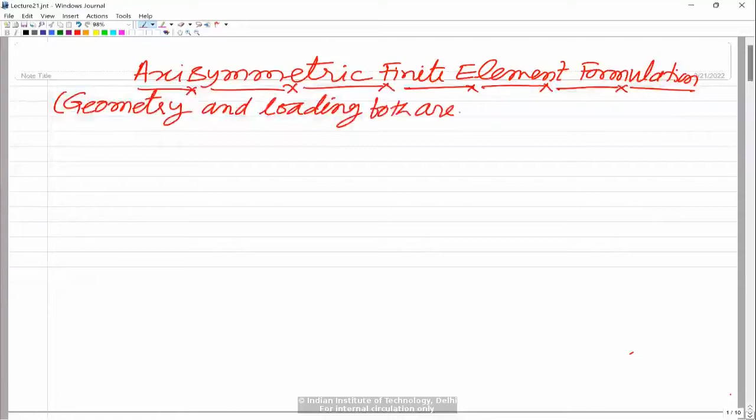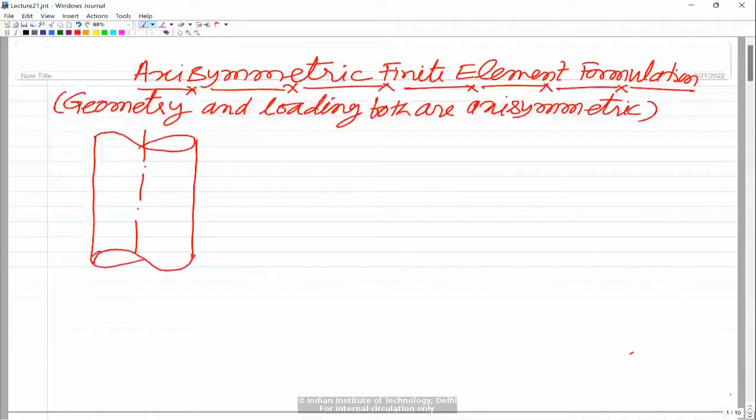The examples are like if you have a rod - there is an axis of revolution about which a cross section can be rotated and generated. Let us say we have this as a rod, under axial load. Although this can be modeled using truss element, when we look at the length to diameter ratio - L by D equal to 3, 2, or 1 - in that case we want to model this differently.

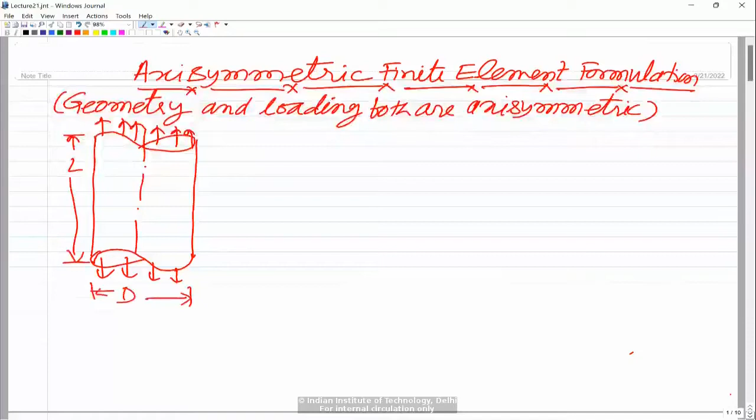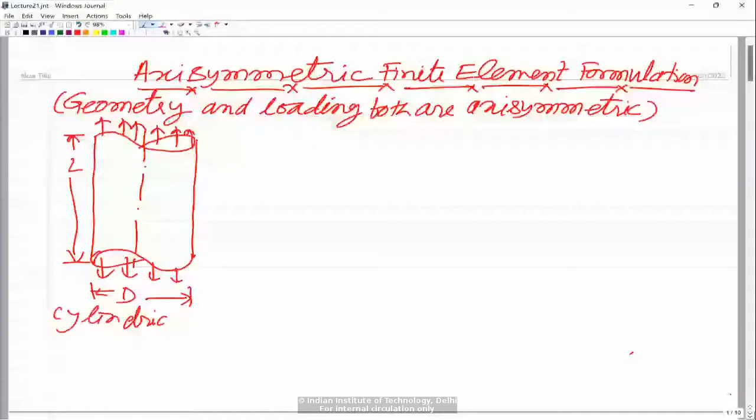So for modeling this rod, because this is a body of revolution, the entire cylindrical rod can be generated by revolving this one cross section about the axis of revolution. So that is one example of axisymmetric problem.

And the loading is also axisymmetric, that means it is independent - throughout the circumference, the same loading is there. So this is one example.

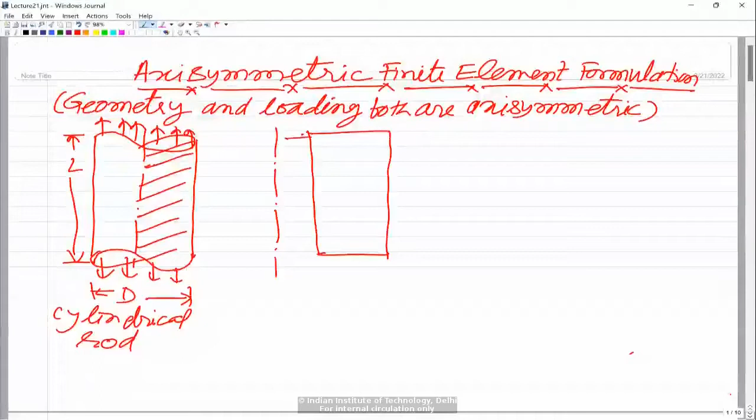Another example is a thick cylinder. Let us say this is the axis of revolution for the thick cylinder, and the thick cylinder is like this, subjected to internal pressure. The whole cylinder can be generated by revolving this cross section about this axis of revolution, giving us the thick cylinder under internal pressure. This is axis of revolution or axis of symmetry.

So this kind of problem, rather than modeling using three-dimensional elements, you model only one cross section. So the computational requirement is less - you will have lesser number of total degrees of freedom, so computationally it can be solved more efficiently.

The general case would be a general body of revolution. Let us say we have a body of revolution like this, but it is thick - this whole body can be generated from this cross section. The simplest example is a submarine, where many conical shell parts - thick conical shells - can be modeled using this. This is again the axis of revolution or axis of symmetry.

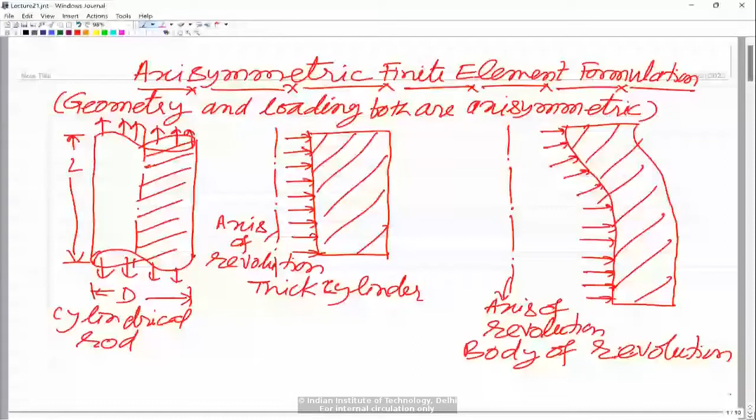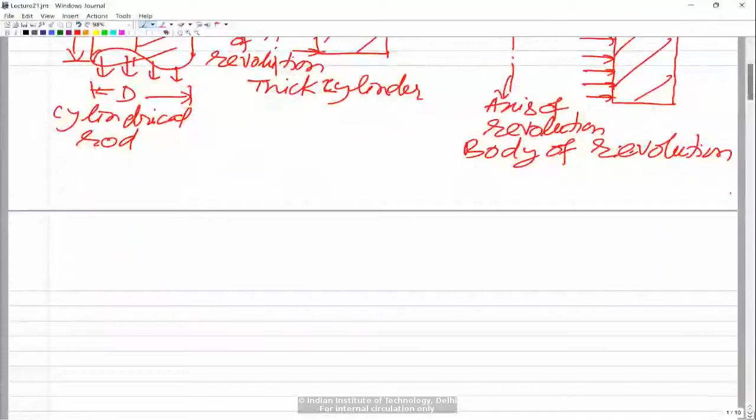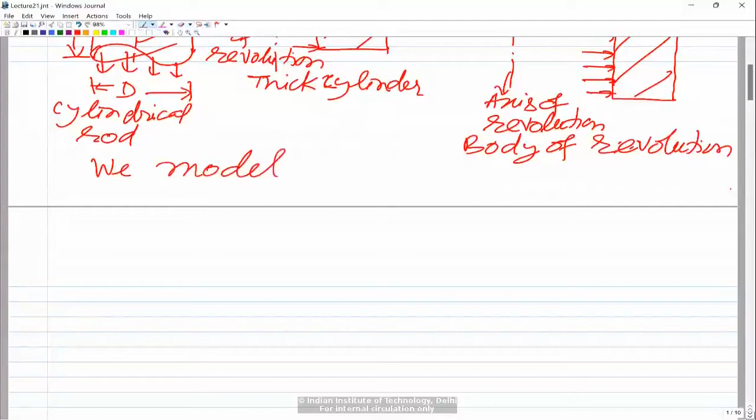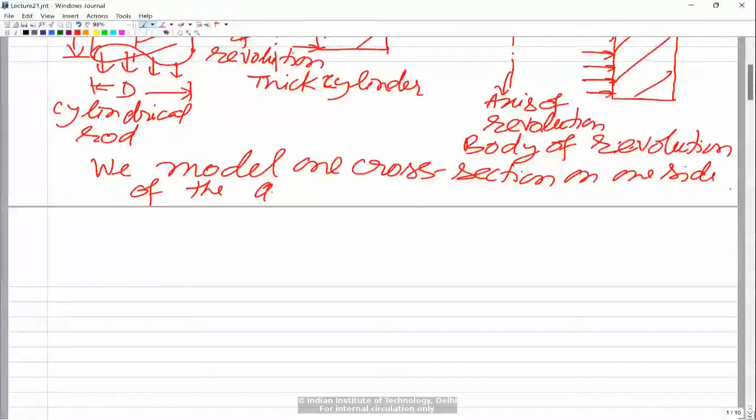So in this model, what we are doing in all the examples I gave is basically modeling the one section on one side of the axis of symmetry. We model one cross section - the one which can be revolved around the axis of revolution and can generate the entire body - on one side of the axis of symmetry or axis of revolution, also called axis of symmetry.

So you can generate the entire body by revolving that cross section. That is why we are using this. So these are the examples. Of course, if you look at most of the submarine, the components would basically be thin shells, but some parts you will have which can be modeled.

This propulsion shaft can be modeled as a body of revolution under thrust, which is axisymmetric. Also, if the bending load is there, you obviously cannot model it because in case of bending, the loading is not the same along the circumferential coordinate direction. So you cannot model under bending loading, but under the axial load and under the internal pressure load you can model that.

Now, of course, the thick cylinder - that's the main example - thick cylinders are bodies of revolution, that is what you can model using this. So wherever you have that kind of body, it can be modeled using this axisymmetric finite element.

So we will discuss and start with the basic concepts. First, as we have been doing, we look at the displacements. Displacements are, again, we are assuming the geometry is axisymmetric, so we can generate the entire geometry by rotating one cross section about the axis of revolution.

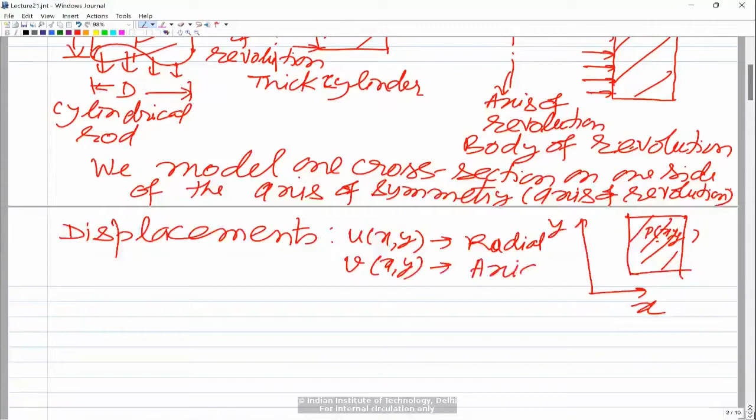Let us say this is the body under consideration, and we want to look at the displacement at any point P with coordinates x and y. So the displacements would be u, which would be a function of x and y - this is basically the radial displacement. Then you will have v along the y direction, that is along the axial direction, which will also be a function of x and y - this is the axial displacement. And the third is w, which would be 0, meaning no circumferential displacement.

Theta is the circumferential direction - no circumferential displacement. So these are the two independent displacements.

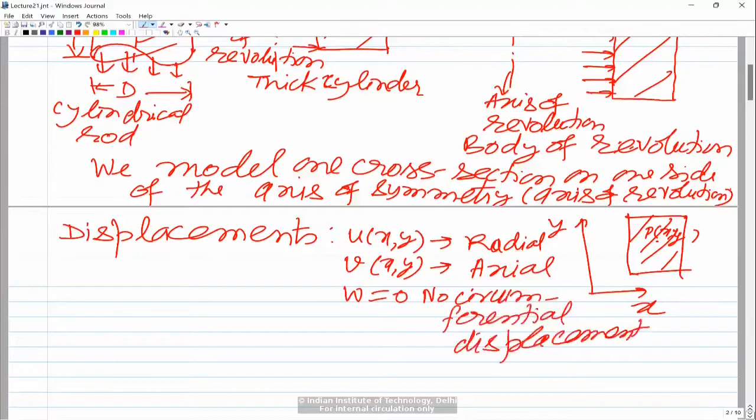So you would see that in terms of displacement, it is similar to plane stress, plane strain problems. There also we had two displacements u and v, which were functions of x and y. But in this case, this is the body of revolution, and you would see the x coordinate is the radius at any point P. So if you see here, this is your x coordinate, which is radius, and y is the y coordinate of any point, that is the axial coordinate.

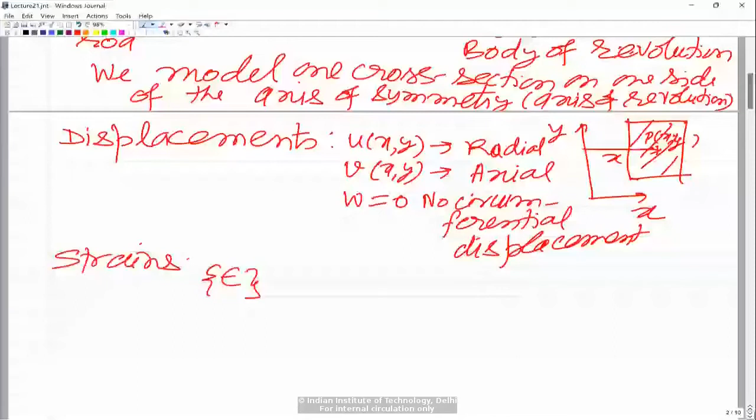So with these two displacements, if you look at the strains now, you would see this is similar to plane stress, plane strain problems. Only thing is, compared to plane stress, plane strain, we will have one extra non-zero strain. So there would be three normal strains: epsilon xx, epsilon yy, epsilon zz, and gamma xy.

Out of this, if you look at epsilon zz, we can also call it epsilon theta theta - this is epsilon zz, which is equal to epsilon theta theta. We call it the circumferential or hoop strain.

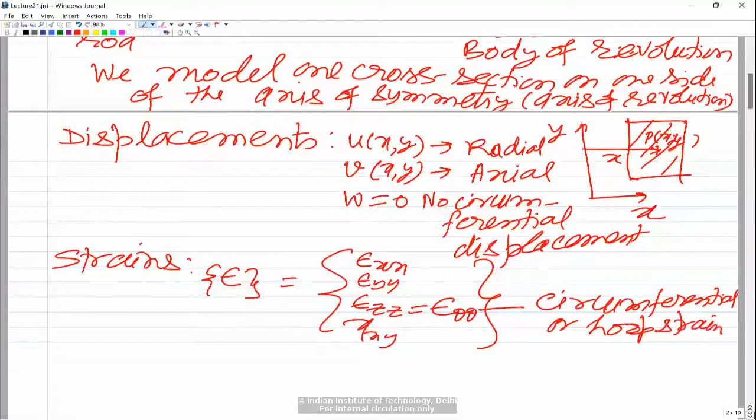But we need to express these in terms of displacements, because displacements are our basic unknowns. You would see epsilon xx is similar to plane stress, plane strain - it is del u by del x, and epsilon yy, strain along the y direction, is del v by del y. But the hoop strain, although there is no displacement along the z direction, there is a hoop strain, and that hoop strain is the radial displacement u divided by radius x. That is the hoop strain epsilon zz, and gamma xy will be equal to del u by del y plus del v by del x.

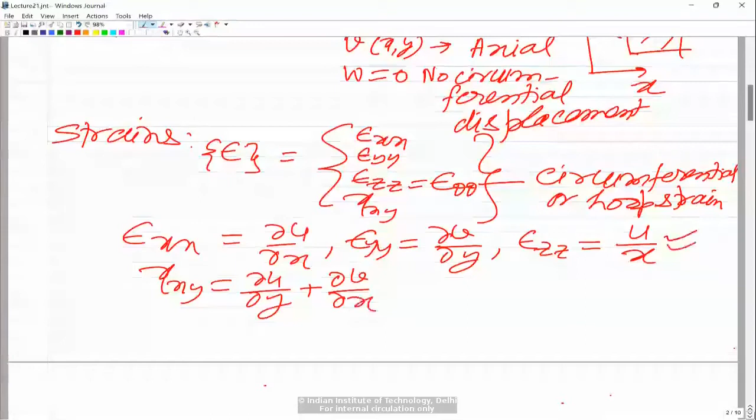So you would see that epsilon xx, epsilon yy, and gamma xy are similar to plane strain problems, but the hoop strain is an additional strain component which you have in case of axisymmetric problems. So we will have to account for that strain as well here.

As you know, epsilon xx - if you take a line element parallel to the x-axis, the change in length per unit original length, when the original length tends to 0, that is what is your epsilon xx. Similarly, epsilon yy - if you take a line element parallel to the y-axis of length delta y and look at its change in length delta v, then delta v upon delta y in the limit when delta y tends to 0 is epsilon yy. And similarly, this is the change in angle between line elements parallel to x and y.

So that is gamma xy, the change in angle between line elements parallel to x and y. And epsilon zz, how do we get non-zero epsilon zz?

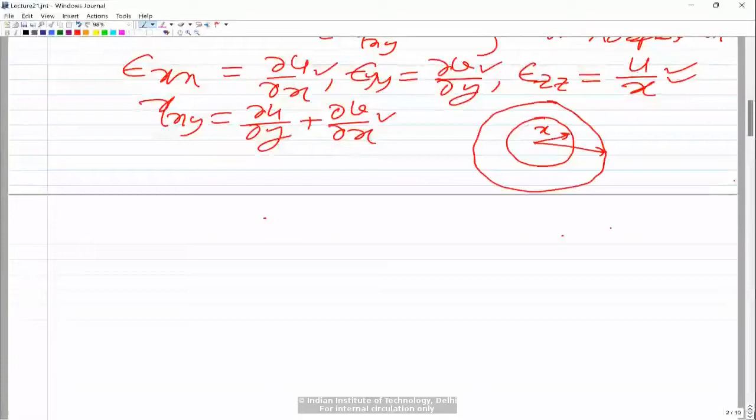It is like this: if you take a circle, say originally the circle is of radius x in the body, then under the application of loading, this circle deforms and takes a deformed shape. Because we have a radial displacement u, the final radius is x plus u. So you would see this is the deformed circle, and this is the undeformed circle.

So actually, if you look at epsilon zz, the interpretation I wanted to give you is this: it is the change in circumference per unit original circumference. Change in circumference would be circumference in the deformed configuration minus circumference in the undeformed configuration. Circumference in the deformed configuration is 2 pi times u plus x, and in the undeformed configuration is 2 pi x, divided by the original circumference, 2 pi x. You will see this comes out as u by x. So this is what you have as the hoop strain or circumferential strain for these problems.

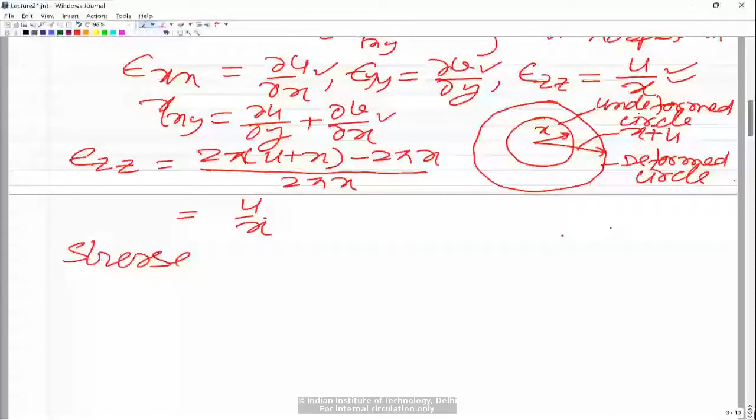And corresponding to these strains, you will have the corresponding stresses. So what are the non-zero components of stresses? Of course, I am not discussing here how to find the principal stresses, the Von Mises stress, or the maximum shear stress, because those are used in design for multi-axial loading problems. You should be able to refer to any book on basics of solid mechanics for that, for practical applications.

The sigma will again have non-zero four components: three normal stresses, sigma xx, sigma yy, sigma zz, along x, y and z directions, and there is a shear stress tau xy. So these are the non-zero components of stresses, while tau yz and tau zx are equal to zero. So these two shear stresses are zero, and the four stress components are non-zero.

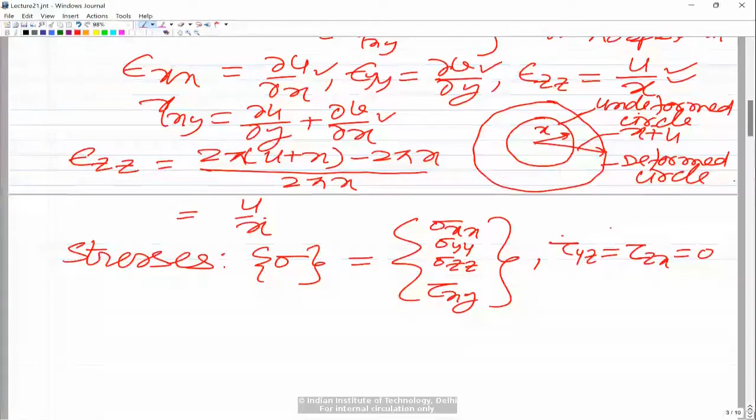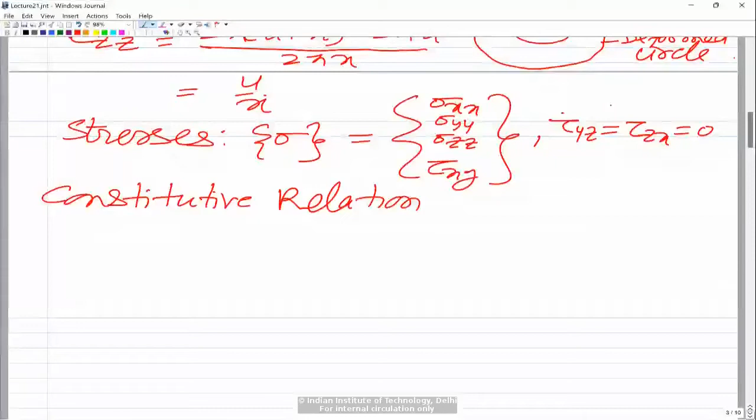As usual, the way we did for the plane stress, plane strain problem, we need to relate the stresses with the strains. So we have what is known as the constitutive relation, that is the relationship between stress and strain. I am writing this only for linear elastic isotropic material, although you can also talk about orthotropic materials and so on.

For this, the form of the stress-strain relationship is going to be the same as we had for the plane stress plane strain problem. So C is the constitutive matrix into epsilon, where sigma and epsilon we have already defined. For the axisymmetric problems, C is similar to what we had for the plane strain case; only thing is one normal strain and corresponding normal stress are the extra non-zero components. So we have E upon 1 plus nu and 1 minus 2 nu.

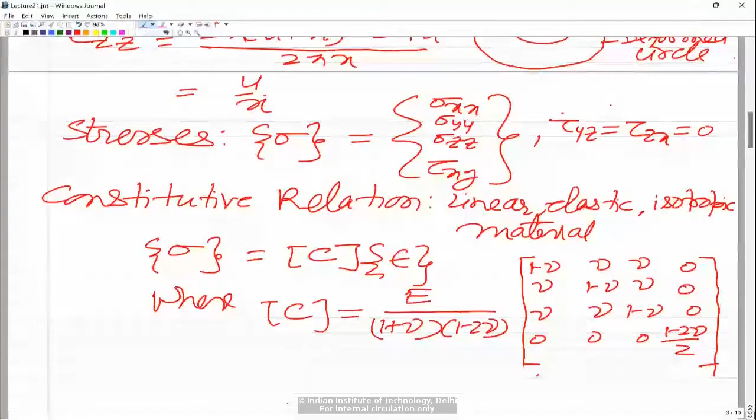So basically, using C, you should be able to write sigma xx, sigma yy, sigma zz, and tau xy in terms of strains. Now for the development of the governing equations, one way is that we look at the differential equations and then obtain the weighted residual statement, then the weak form and the integral functional, or we can write directly the integral functional also. Let me write the total potential energy functional.

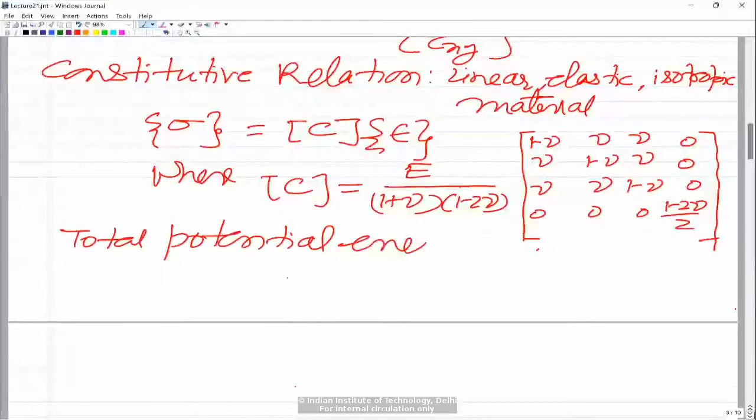So total potential energy functional would include strain energy. Strain energy is half integration over volume of sigma transpose into epsilon, and sigma is C into epsilon. So sigma transpose becomes epsilon transpose into C transpose. C is symmetric, so its transpose is same as C. So you can write this as epsilon transpose into C into epsilon into dV. This is the strain energy.

The first term is strain energy, then potential of body forces. We are writing this similar to what we have been doing earlier. So U transpose into body forces, and we will have only two components of body forces along x and y direction, FBx and FBy, integration over volume, and then the integration over the boundary of the element.

The boundary could either be having normal along radial direction, or it can have normal along the axial direction, that is y direction. So I'm writing this as a boundary integral, and again the terms are similar to the plane stress plane strain problem.

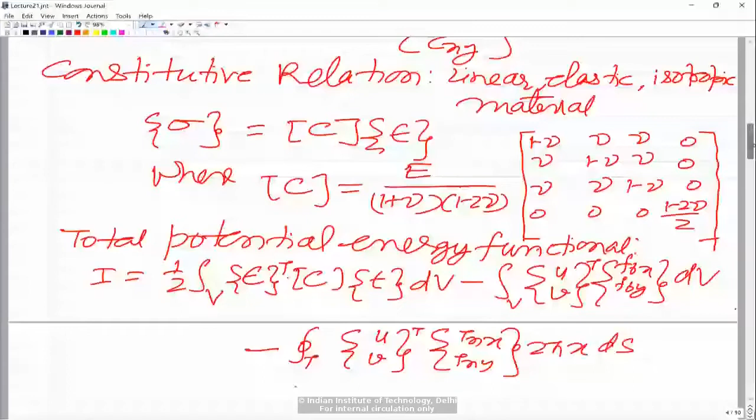We use the same quantities: the body forces fbx, fby, traction forces tnx, tny, which are also forces per unit area. Here we need to multiply by 2 pi x into ds, where ds is the length along the boundary. So either the boundary is having normal parallel to x axis, that is radial direction, or boundary having normal parallel to y axis, that is axial direction.

So this is the total potential energy functional. This is as far as the basics of any axisymmetric problem formulation are concerned. Now we look at a particular element.

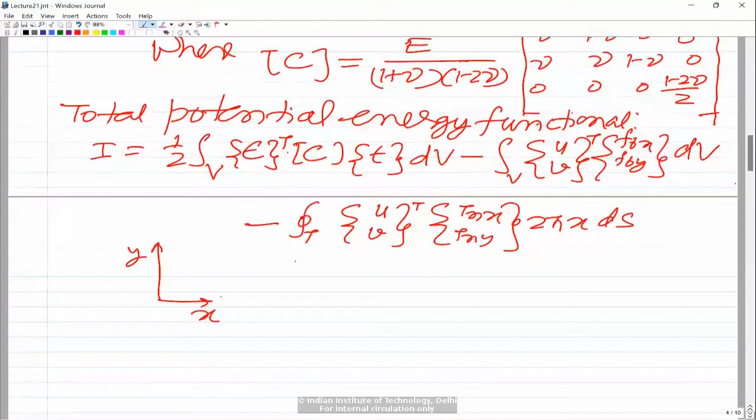We want to do the axisymmetric formulation for an element. Let's say x is the radial direction here, y is the axial direction, and the element is a four noded quadrilateral, having nodes 1, 2, 3, 4, with coordinates. We map this to a square in the natural coordinate space, xi and eta, with nodes 1, 2, 3, and 4. So this is the four noded element we are talking about.

This is a four noded isoparametric axisymmetric finite element. Isoparametric means geometry and displacements are interpolated using the same shape functions. So the shape functions are going to be same as what we developed for the plane stress, plane strain case.

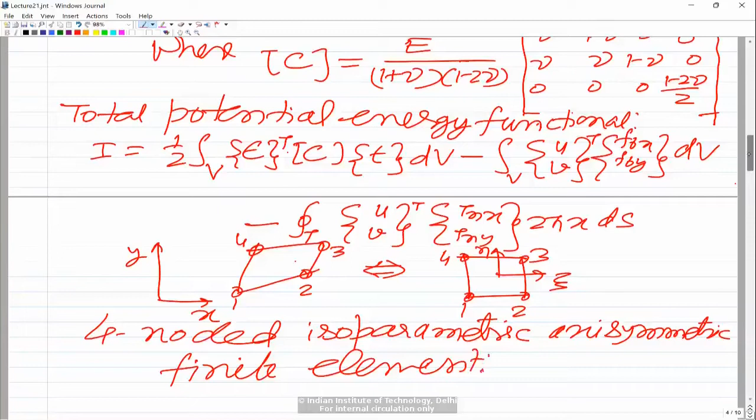I'm directly writing u and v. The displacement approximation would be similar to what we had for the plane stress, plane strain problems. Actually, if you look at many of the packages, you'll have this 2D element, and then you can choose either plane stress, plane strain, or axisymmetric, because the formulation is more or less the same for all three problems. So these subroutines in the softwares are actually combined.

If you look at the degrees of freedom, we write all the degrees of freedom of first node, second node, third node, and then fourth node. Primary variables are displacements along x and y, that is radial and axial displacements. So for the element total we will have 8 degrees of freedom: u1e, v1e, u2e, v2e, u3e, v3e, u4e, and v4e. These are the values of U and V at nodes 1, 2, 3, and 4.

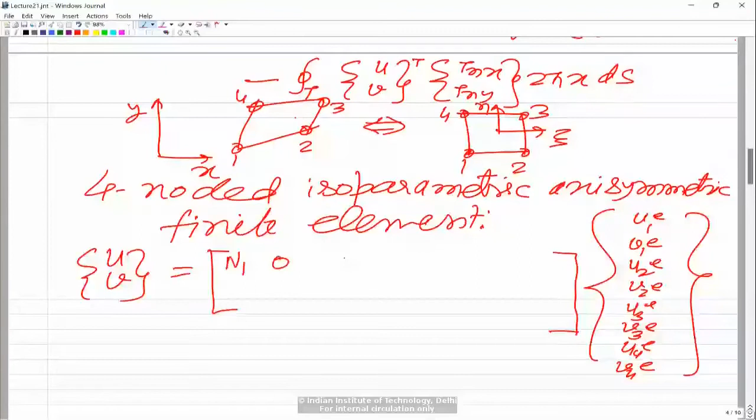The shape functions are the same N1, N2, N3, N4. I'm not writing them again because we have already defined them for the plane stress, plane strain case. So we have n1, 0, n2, 0, n3, 0, n4, 0, and then for v it's 0, n1, and so on. This gives u equal to n1 u1e plus n2 u2e plus n3 u3e plus n4 u4e, and similarly for v.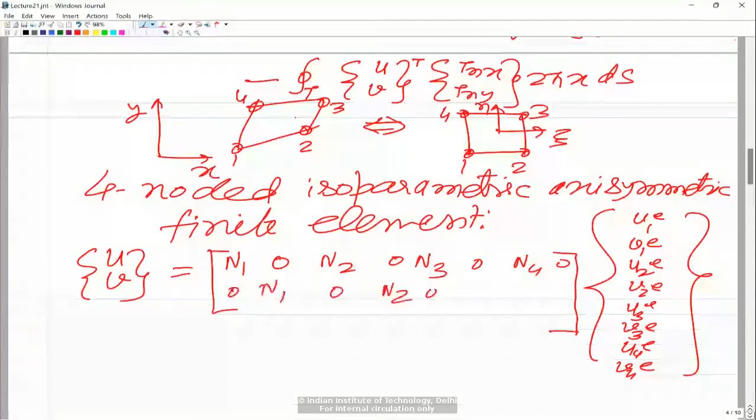As usual, we write this matrix as H matrix into DE, where this is H and this is D. You interpolate x and y also in exactly the same way. X is of course the radial coordinate, or its radius. So you write x equal to sum over i from 1 to 4 of ni into xi, and similarly y coordinate you write as ni into yi, sum of four terms, i going from 1 to 4.

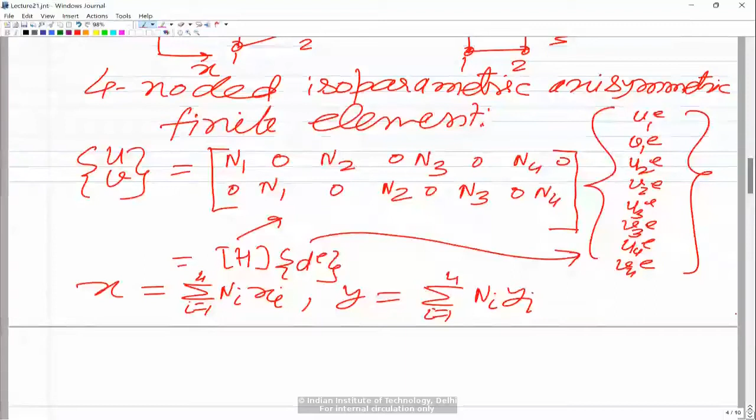The Jacobian matrix will also be the same way I had introduced the concept earlier. Once you have x and y expressed in terms of xi and eta, you can get your J, the Jacobian matrix, which is del x by del xi, del y by del xi, del x by del eta, and del y by del eta.

Then you need the strain interpolation for the strain, epsilon, which consists of four elements for axisymmetric problems: three normal strains epsilon xx, epsilon yy, epsilon zz, and the gamma xy. Gamma xy can also be written as twice of epsilon xy, since epsilon xy is the tensorial component of strain. This will again be written in terms of the derivatives of the shape functions.

We already have learned how to get the shape function in terms of xi and eta, and then how to get their derivatives with respect to x and y. We have already discussed that concept. These degrees of freedom are the same: u1e, v1e, u2e, v2e, u3e, v3e, u4e, and v4e.

Now epsilon xx is del u by del x, so it is in terms of u, and it's the derivative with respect to x. u1, u2, u3, u4 are basically values of u at node points, so they are constant. So the derivative will only go with the shape function. So here you will have del n1 by del x, 0, del n2 by del x, 0, del n3 by

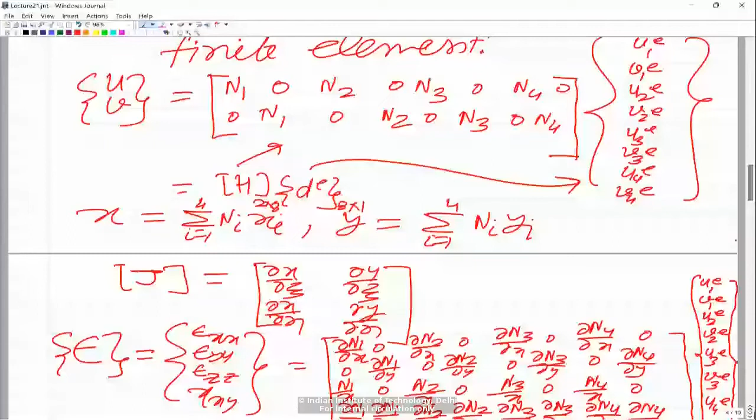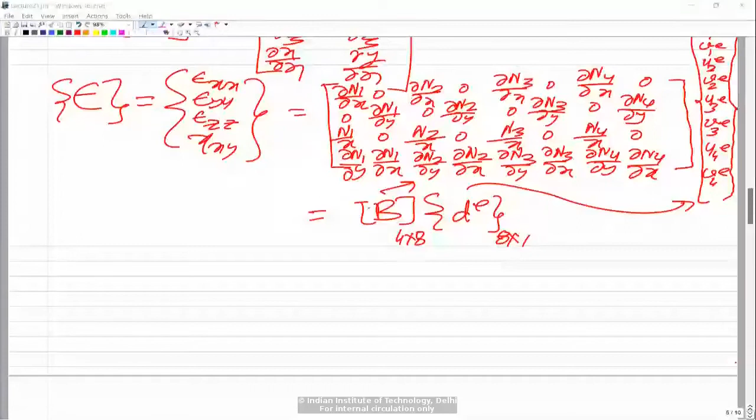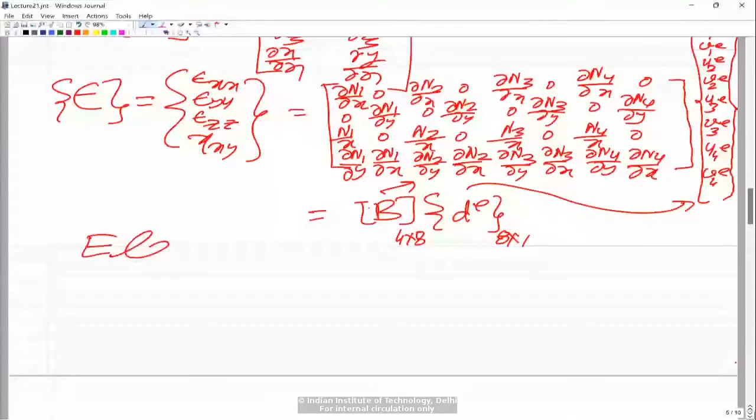So once you have defined H and B, the procedure for developing the element level governing equations is the same. That is, we basically substitute these approximations in the integral functional, then take the variation of the integral functional and equate it to 0, so delta I equal to 0 for arbitrary value of delta D, and from there we get the element level governing equations. So those will be the same. You will see that the form of the element level governing equations is actually going to be the same, so you should be able to derive it. I am not deriving that, so I am directly writing the element level governing equation.

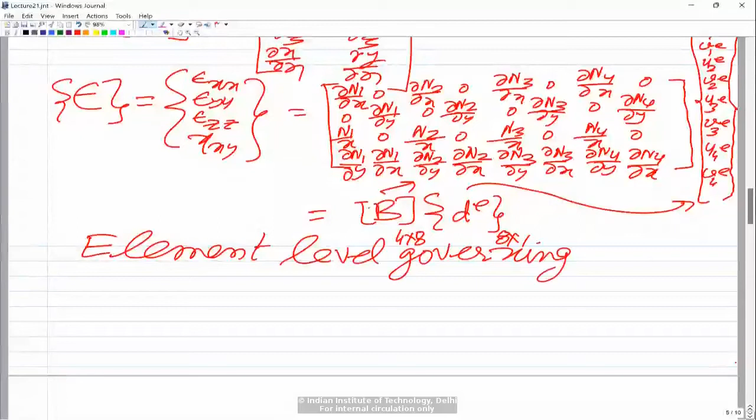So I'm just telling you the essential aspects of axisymmetric finite element where you can use this. In this case, the governing equation is the same, that is element level stiffness matrix into D is equal to f external, and the assembly, imposition of boundary condition, and solution is also the same. So I won't be discussing those aspects. So what is different, that is what I am discussing here.

So if you look at the element level stiffness matrix Ke, it would now be the volume integral converted into integration with respect to xi and eta. So basically integration from -1 to +1, -1 to +1, B transpose into C into B, and then for the volume, when this is the axis and this is the body you are considering, what we are doing is to get the volume dv, we take a differential element, which is written as J times d xi d eta, and into

circumference, that gives you the volume. So that means if you revolve this small area about this axis of revolution, you get the volume. So for that, you multiply by the length of that circle, which is 2 pi x.

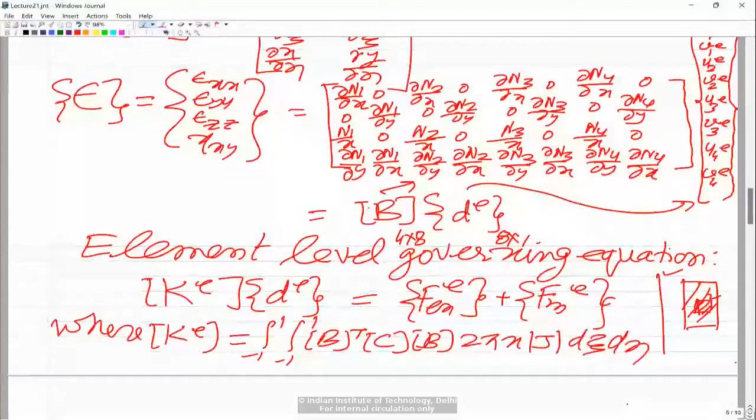So you will have here 2 pi x into determinant of j into d xi d eta. This will be basically the stiffness matrix, and again we will not be evaluating it explicitly by multiplying and integrating each element with respect to xi and eta, but we do numerical integration.

So we write it as summation i going from 1 to m and j going from 1 to n, as we did earlier. So we have here b transpose into c into b into 2 pi x. Of course x is also a function of xi and eta, as you would know, because x we have expressed already in terms of xi and eta.

This is evaluated at xi i eta j into wi wj. Similarly, the f external for the element is integration -1 to +1, -1 to +1, and then we have h transpose, then body force components fbx and fby, body forces along x and y, and then 2 pi x to get the volume into determinant j d xi d eta. So this is the external load vector, and the only difference compared to the plane stress plane strain problem is the presence of this term, which ultimately gives you the volume.

This again can be written using Gauss quadrature numerical integration. I can write this as i equal to 1 to m dash and j equal to 1 to n dash, and then we have here h transpose fbx fby and 2 pi x into determinant of j, this whole thing evaluated at xi i eta j wi wj.

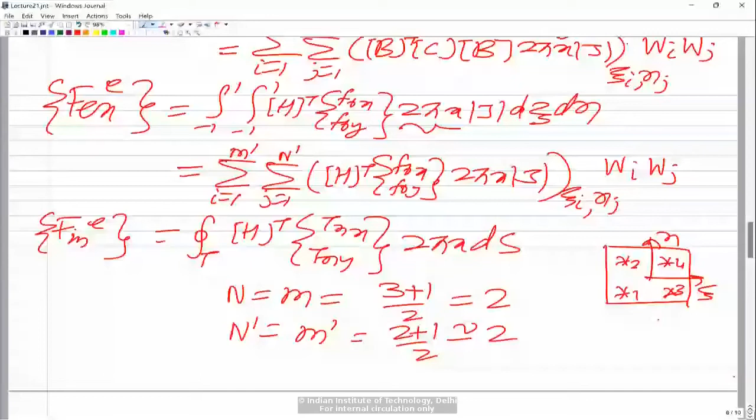Now next is the 3D solid element. So why do we go for 3D solid elements? It's whenever all three dimensions of the body are comparable and we cannot make any approximation, that is, all the displacements, all the stresses are non-zero and they are functions of all three coordinates x, y and z. Then we go for the 3D solid elements. That is the next thing I'm going to discuss.

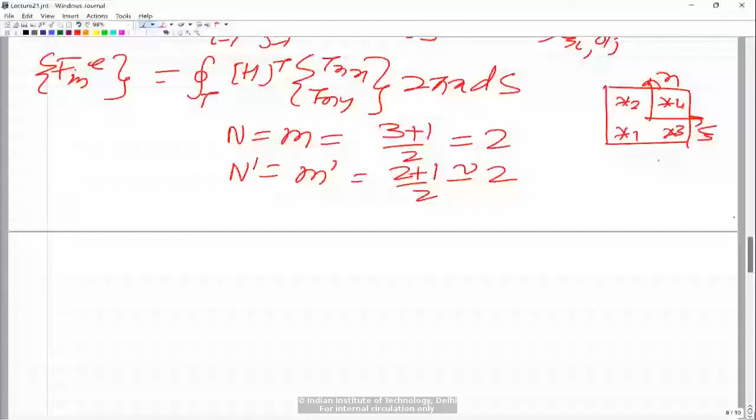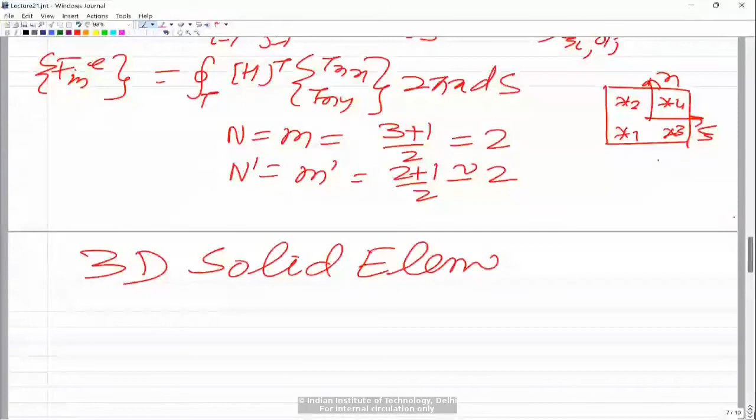So next I'm going to discuss this 3D solid element, mainly the 8-noded isoparametric brick element. Of course, in 2D you could also have 8-noded elements. The only difference would be that you'd have 8 nodes and the shape functions would be different. The sizes of the matrices and vectors would be different, but otherwise everything is the same. Maybe I would demonstrate the other elements sometime.

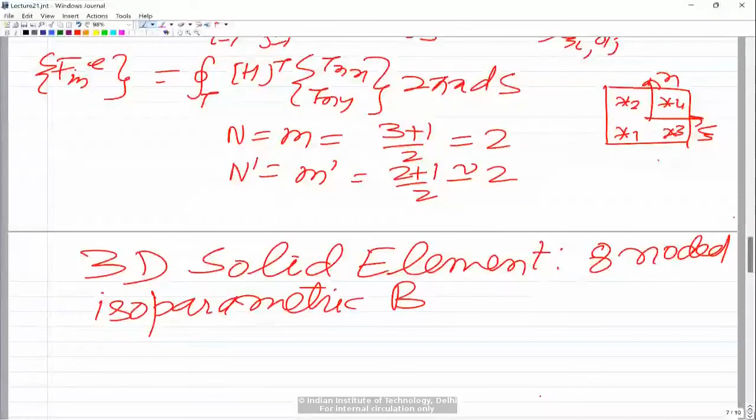So now first let me talk of this 8-noded isoparametric brick element. Commonly we call it a brick element because its shape is similar to a brick, so that is the common terminology used. Here what we are talking of again is an isoparametric element.

That means the actual body is discretized. As I said, all the dimensions are significant, and you have all the displacements along x, y, z non-zero and functions of all three coordinates x, y, z. That is why you use the 3D elements.

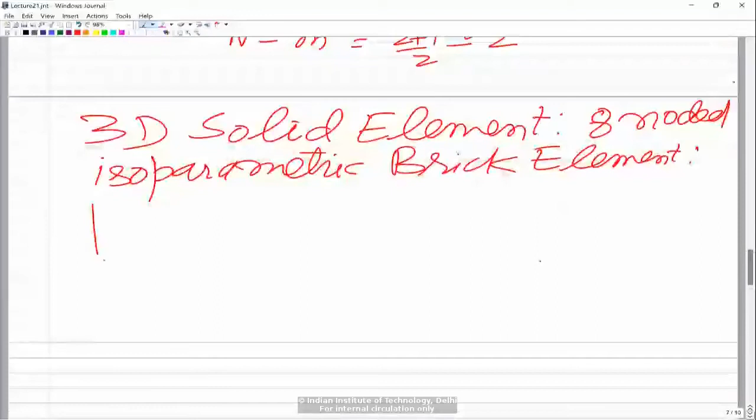So now let me sketch the element. You have these coordinate directions, say x, y, and z, and the element is a parallelopiped. This is basically like a brick, and the node numbering is such that we number this corner node as 1, 2, 3 - the bottom nodes I'm numbering first, and then again starting here 5, 6, 7, and 8.

In 2D also we have an 8-noded element, but that is in the same plane, in the xy plane. But here this is in 3D space. So this is the parallelopiped in the physical coordinate space.

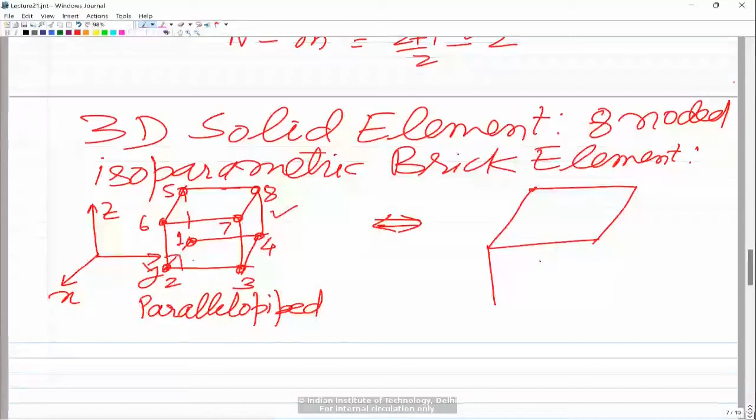And again this is mapped to a cube in the natural coordinate space. So in the natural coordinate space you have this element. Although what I have drawn here looks more like a parallel cuboid, actually a cube, this can be any parallelopiped - it's not necessary that the angle between these edges has to be 90 degrees. But in the natural coordinate system, of course, it has to be a cube.

So now the coordinate directions are - you come from here to here. So from the center, now you have the xi coordinate, and then from here you have the eta coordinate, and then from here you have another third coordinate, zeta. So now we have xi, eta, and zeta - these are the coordinates.

Nodes are the same, 1, 2, 3, 4, 5, 6, 7, 8 in the physical coordinate space are mapped to 1, 2, 3, 4, 5, 6, 7, 8 in the natural coordinate space. So now this is the element we are talking about, and this is a cube here.

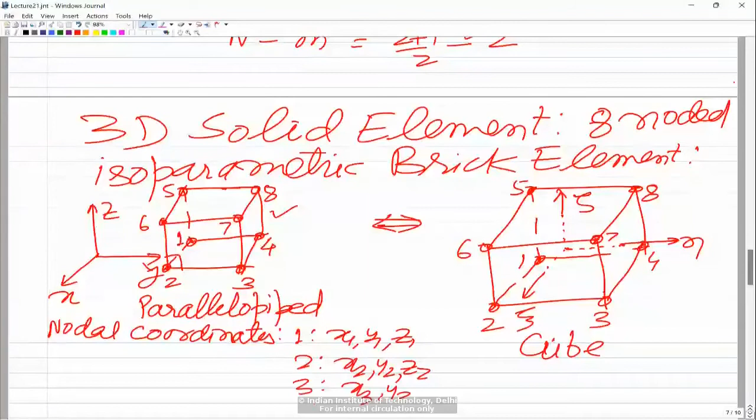If you look at the nodal coordinates in the physical coordinate space, the nodal coordinates are going to be like node 1 will have coordinates x1, y1, z1. Node 2 will have x2, y2, z2, and so on. Node 3 will have x3, y3, z3, etc. Similarly, for the natural coordinate space, node 1 will have coordinates as you see. The origin of this xi, eta, zeta coordinate system is at the center, so the coordinates of node 1 are going to be such that all the xi, eta coordinates would be negative.

So node 1 has -1, -1, -1 and node 2's xi coordinate would be positive: 1, -1, -1. Node 3's xi and eta coordinates would be positive: 1, 1, -1. Node 4's xi coordinate is -1, eta coordinate is +1, and zeta is -1. So these are the coordinates.

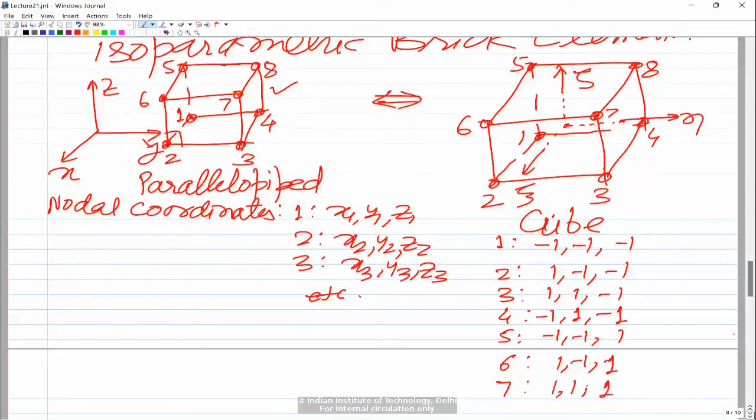Similarly, node 5 will have -1, -1, +1. Node 6 will have 1, -1, +1. Node 7's coordinates would be 1, 1, 1. And the coordinate of node 8 in the natural coordinate space would be -1, 1, 1. So these are the natural coordinates of all 8 nodes of this element.

Now in any formulation, as we are starting, the first thing we talk about is the displacements. The displacement along all three directions is non-zero, so we have u, which is a function of all three coordinates x, y, z. u is the displacement along x, v is the displacement along y, function of x, y, and z. w is the displacement along z, which is also a function of x, y, and z. So all the displacements are non-zero for the 3D solid body.

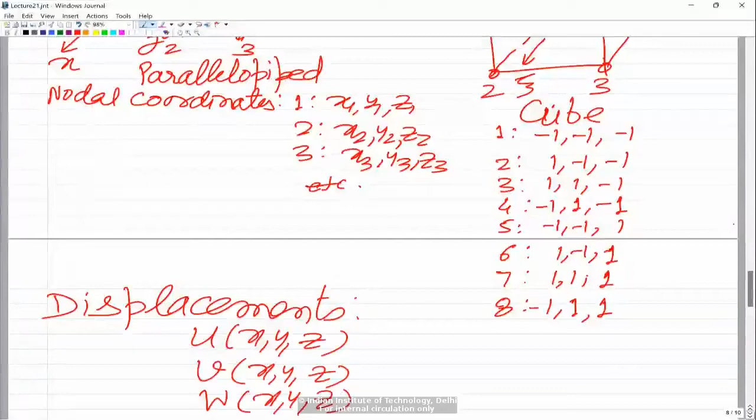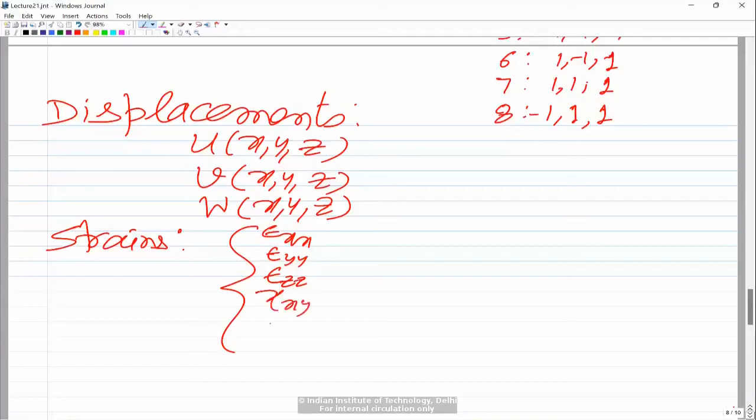And then if you look at the strains, there are now 6 components of strains: 3 normal strains, epsilon xx (normal strain along x direction), epsilon yy (normal strain along y direction), epsilon zz (normal strain along z direction), and then shear strains gamma xy, gamma yz, and gamma zx. So these are the non-zero components of strains, and we need to worry about the strain displacement relations.

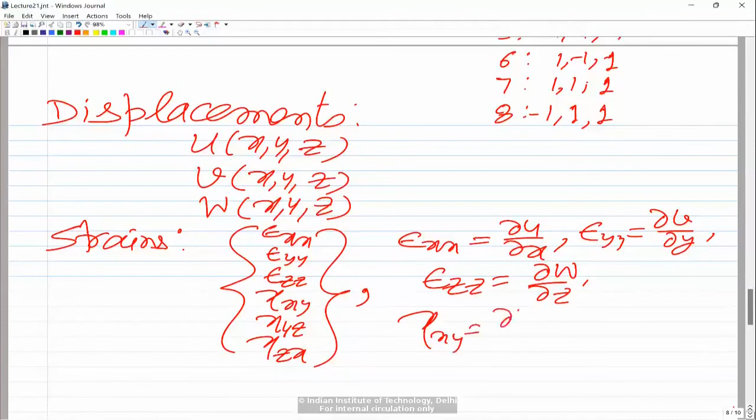Epsilon xx is the rate of change of u with respect to x, so del u by del x. Epsilon yy is the rate of change of v with respect to y, del v by del y. Epsilon zz is del w by del z, the rate of change of w with respect to z. The shear strains are similarly standard relations - we have strain displacement relations that have to be used here. Gamma xy equals del u by del y plus del v by del x, gamma yz equals del v by del z plus del w by del y, and gamma zx equals del u by del z plus del w by del x. So these are the various strain components for this 3D solid body.

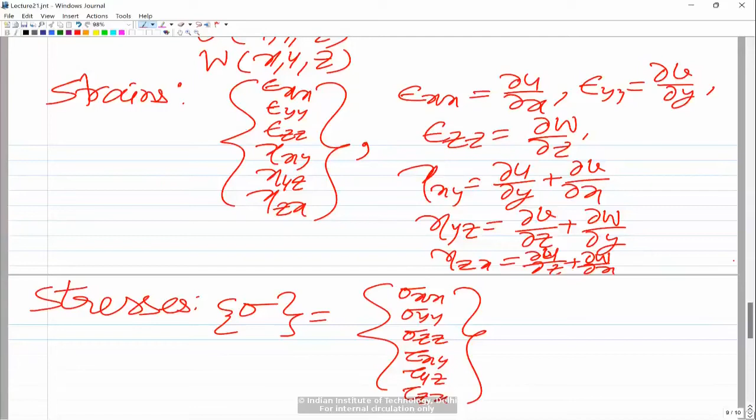And then of course we have the stress strain relationship. The stresses have 6 components which are non-zero. Sigma would have 6 components: normal stress along x, normal stress along y, normal stress along z, shear stress tau xy, shear stress tau yz, shear stress tau zx. These are the non-zero components of stresses for the 3D body, where sigma xx is normal stress along x, y, and z respectively, and tau xy is the shear stress in the xy plane, tau yz is shear stress in the yz plane, and tau zx is shear stress in the zx plane.

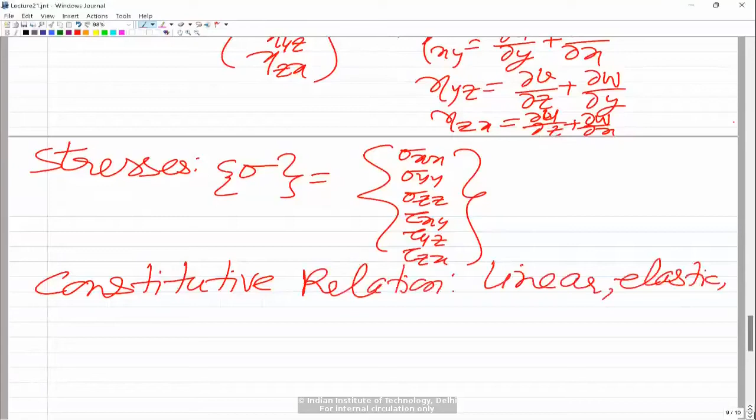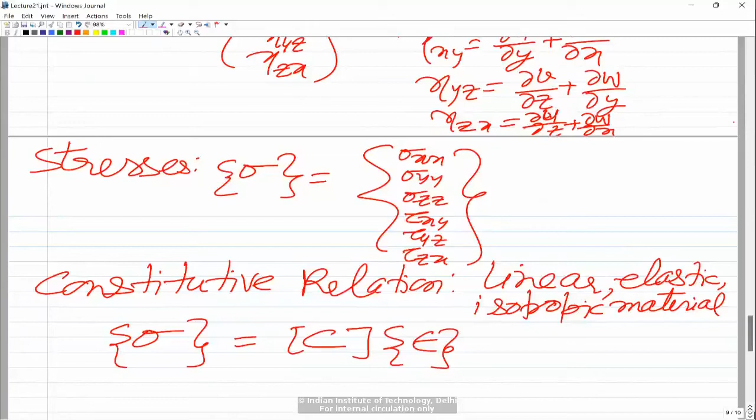Then we need to look at the stress strain relationship, what we call the constitutive relation - the relationship between stress and strain. I am going to write this only for the linear elastic isotropic material. The form of the relationship is the same as what we discussed for the axisymmetric case: C into epsilon, where C is the constitutive matrix. This C matrix is given by the same form, only now all the stresses and strains are non-zero.

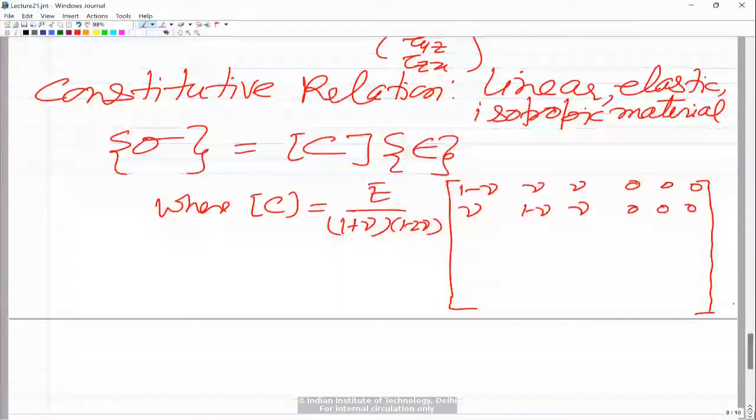So we have 1 plus nu, 1 minus 2 nu, and now it is going to be a 6 by 6 matrix, because now we have 6 components of stresses and strains. This is 1 minus nu, 0, 0, 0, and then nu, 1 minus nu, 0, 0, 0. For isotropic materials there is no coupling between the normal strains and shear stresses, and similarly between the shear stresses and the normal strains, so those coupling terms are zero. Only there is coupling between the normal stresses and normal strains, so 1 minus nu, 0, 0. Similarly there is no coupling between the stresses and strains in different planes, so here you have 1 minus 2 nu by 2, so that when you multiply this you get E upon 2 into 1 plus nu, which is G.

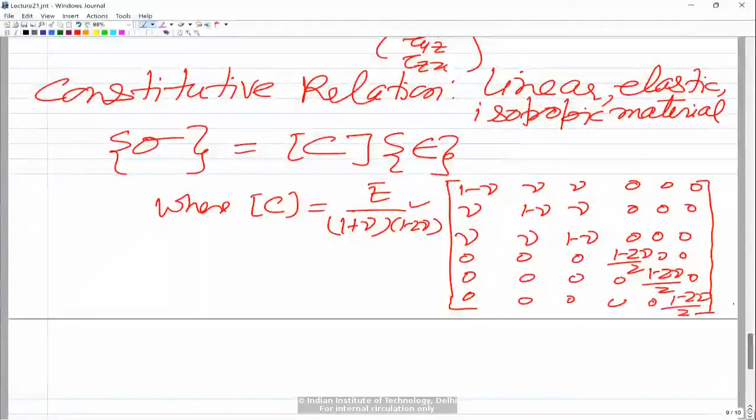So we have 0 0 0, 1 minus 2 nu by 2, 0, and then 0 0 0 0, 1 minus 2 nu by 2. So this is the constitutive matrix for 3D. You would see that the formulation is actually the same as before, similar to axisymmetric problems. Only thing is now there are more non-zero components of displacements, strains, and stresses. So that's the only difference.

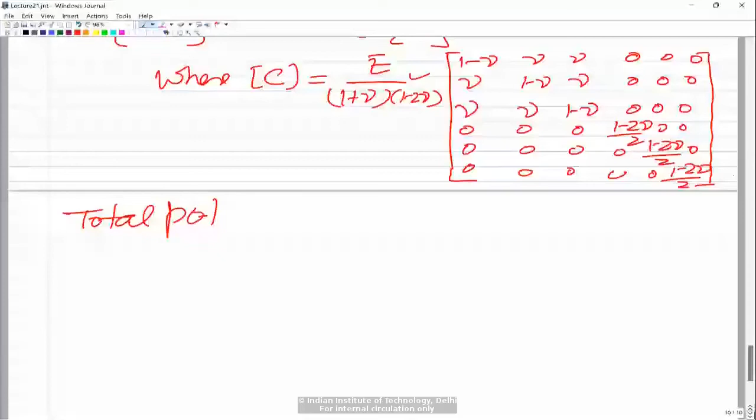So now for this problem, if you look at the total potential energy functional, it would consist of the strain energy and the potential of body forces and potential of surface tractions. This can be written as half an integration over the volume of the body, where the strain energy is half of sigma transpose into epsilon. That is sigma xx into epsilon xx plus sigma yy into epsilon yy plus sigma zz into epsilon zz plus tau xy into gamma xy plus tau yz into gamma yz and so on. These 6 components can be written as sigma transpose into epsilon, and sigma is C into epsilon. So ultimately you can write that as epsilon transpose into C into epsilon, since C is symmetric, integrated over the volume dV.

Then you have body forces. Now the body forces would be there in all 3 directions, so you will have UVW transpose, and then FBX, FBY, FBZ, the body force along X, Y, Z direction, integrated over dV.

And the boundary is now going to be surfaces. For 1D problems, the boundaries were points. For 2D problems like plane stress, plane strain, axisymmetric, the boundaries were lines or curves. And for 3D problems, the boundaries are going to be surfaces.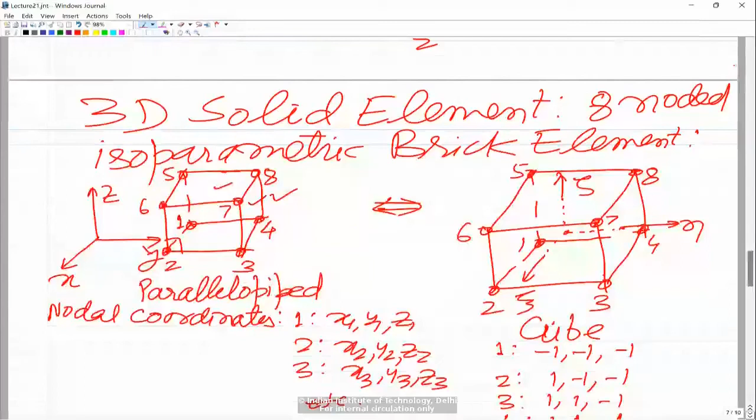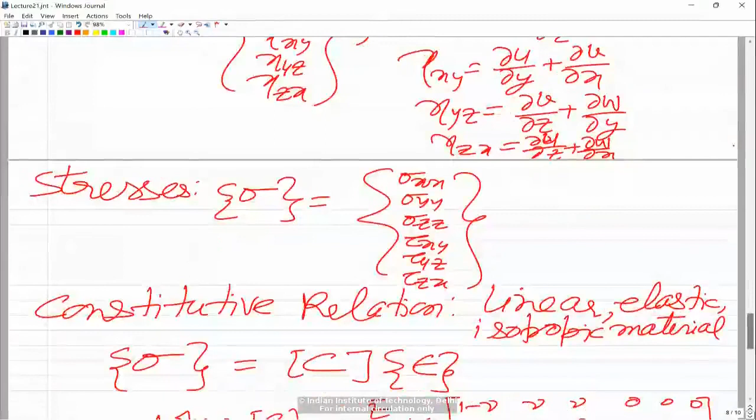The body forces FBX, FBY, FBZ are the forces per unit volume along X, Y, Z direction acting throughout the volume of the body, and the surface tractions TNX, TNY, TNZ are the forces per unit area on a surface having normal along n. The components of these force per unit areas are Tnx, Tny, and Tnz. So these are the traction components.

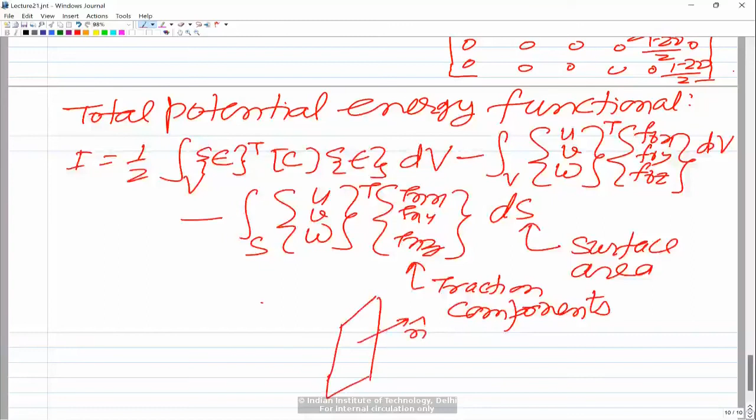So what we are saying is, suppose you have this as the surface and the outward normal is along this direction. On this surface you will have a force along the normal direction. Let us say the normal is not along any one of the coordinate directions. So let us say we have one coordinate direction which is in this direction, that would be Tnx. Another coordinate direction is Tny, and this is Tnz. So these are the force per unit areas. Tnx, Tny, Tnz are the components along x, y, and z of the force on an area having normal along n. So these are the traction forces.

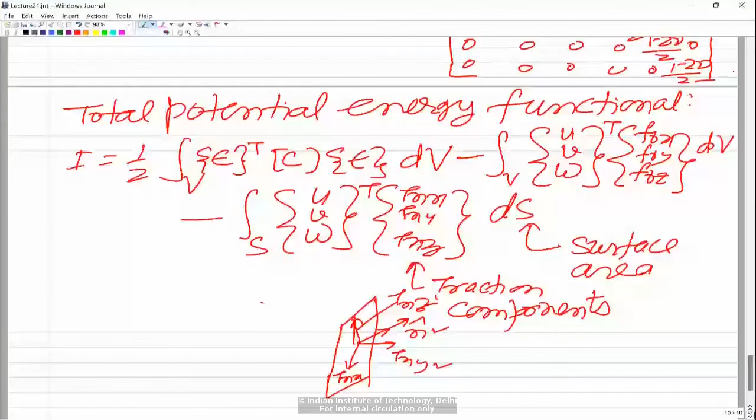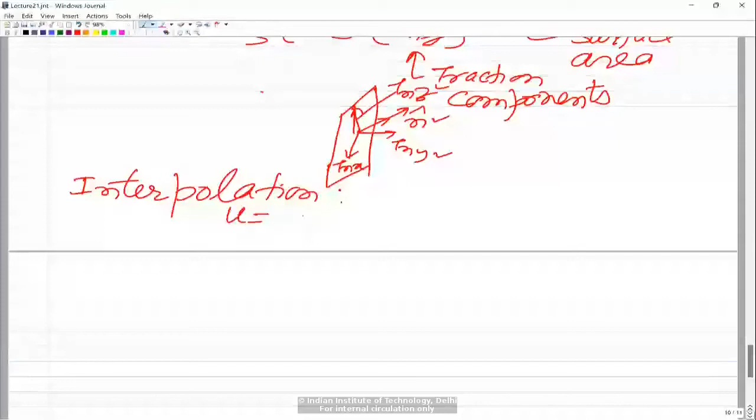And then now if you look at the interpolation, we'll have to look at the interpolation of all the variables. The interpolation is similar to before, and now there are 8 nodes. I will write directly in terms of shape functions, but essentially we are writing u, and similarly v, w, in an identical manner as a0 plus a1 xi plus a2 eta plus a3 zeta.

And then you have plus a4 xi eta plus a5 eta zeta, plus a6 xi zeta, and then a7 which would be xi eta zeta. So these are the 8 terms you will have in the approximate solution from Pascal's triangle for 3D, that is with 3 coordinates xi, eta and zeta.

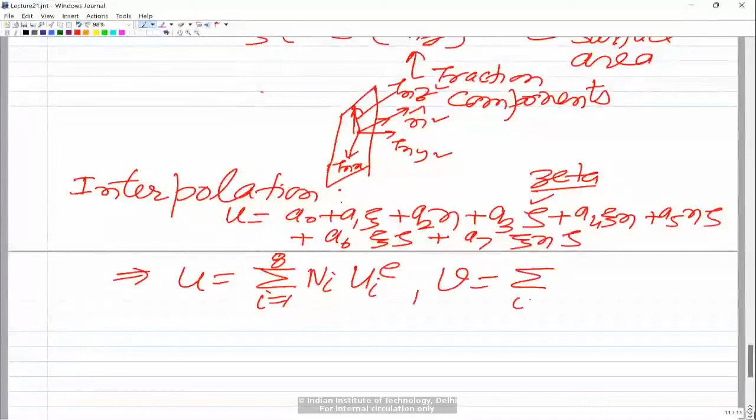So ultimately you can express a0 through a7 in terms of values of u at node points, that is u1 through u8. You would be able to write u equal to summation i going from 1 to 8 of ni into ui. Similarly you write v, the displacement along y direction, as summation ni into vi, and w, the displacement along z direction, as summation ni into wi.

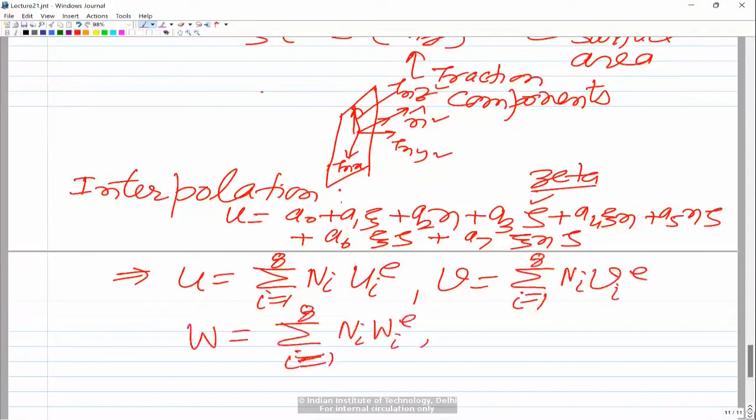Same with the x, y, z coordinates, because we also need to express x, y, z in terms of xi, eta and zeta. So we write x equal to summation ni xi, y equal to summation ni yi, and similarly z coordinate equal to summation ni zi.

So this is how you write all the interpolations, and you would see the rest of the derivation is exactly similar to what we have been doing so far for the plane stress, plane strain and axisymmetric finite elements.

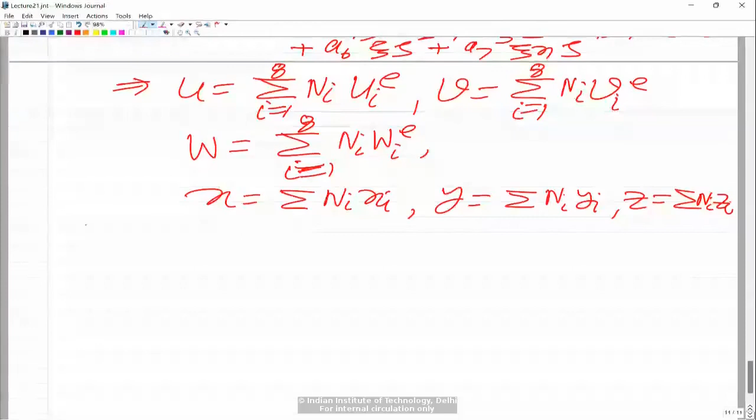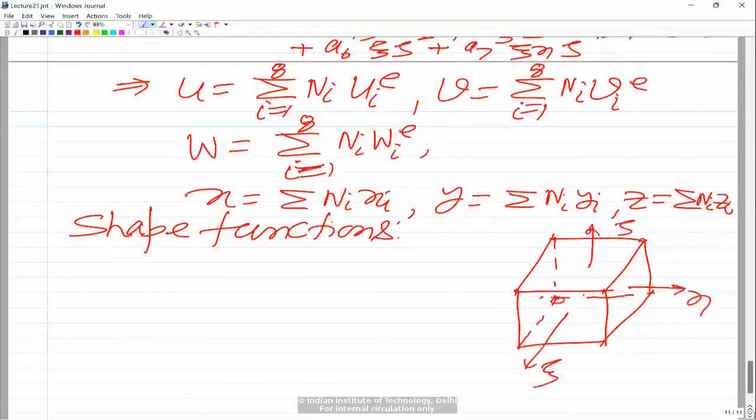Now let me write the shape functions, the ni's. These are interpolation functions, and there are going to be 8 of them. Let me sketch the element in the natural coordinate space so I can refer to it. This is the xi coordinate, this is the eta coordinate, and this is the zeta coordinate, and the nodes are 1, 2, 3, 4, then 5, 6, 7 and 8.

n1 is the shape function corresponding to node 1. What we do is take the equations of the surfaces excluding node 1. So we take the surface whose equation is 1 minus xi equal to 0, the surface whose equation is 1 minus eta equal to 0, and the surface whose equation is 1 minus zeta equal to 0. We take the multiplication of all three: 1 minus xi, 1 minus eta, 1 minus zeta.

Then we make sure this is unity at node 1. The coordinates of node 1 are minus 1, minus 1, minus 1. So we put xi equal to minus 1, eta equal to minus 1, zeta equal to minus 1, and we get 8. So we divide by 8 so that this is unity at node 1. So the shape function n1 is 1 by 8 times 1 minus xi, 1 minus eta, 1 minus zeta.

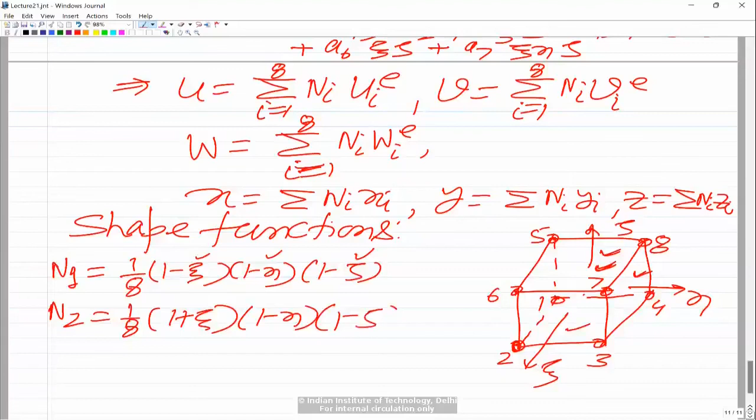Similarly for n2, corresponding to this particular node, we take this surface and this backside surface. So we get 1 by 8 times 1 plus xi, 1 minus eta, 1 minus zeta. This ensures that n2 is unity at node 2 and 0 at all other nodes, similarly n1 is unity at node 1 and 0 at all other nodes.

Similarly n3 would be 1 by 8 times 1 plus xi, 1 plus eta, and 1 minus zeta. That 1 minus zeta term continues to remain for all the nodes 1, 2, 3 and 4. Then n4 would similarly be 1 by 8 times 1 minus xi, 1 plus eta and 1 minus zeta.

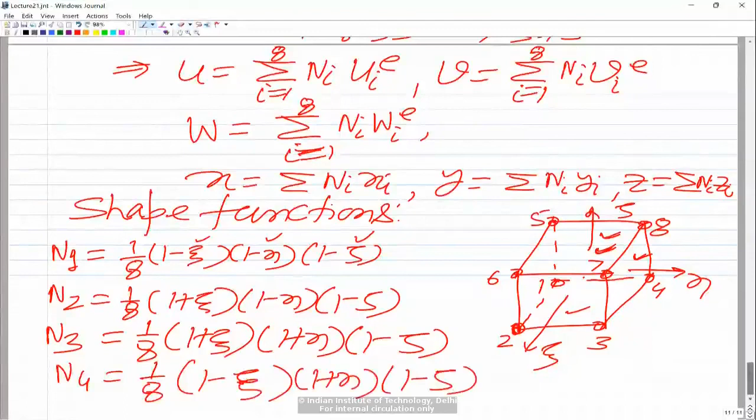Then n5 would be for the top node, so you can write it from n1, n2, n3 by analogy. The only difference is that for nodes 5, 6, 7 and 8, in place of the top surface we have the bottom surface, whose equation is zeta equal to minus 1, or 1 plus zeta equal to 0. So in place of that term we have plus, and the other things remain the same. So n5 would be 1 by 8 times 1 minus xi, 1 minus eta, 1 plus zeta.

n6 would be 1 by 8 times 1 plus xi, 1 minus eta, 1 plus zeta. n7 would be 1 by 8 times 1 plus xi, 1 plus eta, 1 plus zeta. And n8 would be 1 by 8 times 1 minus xi, 1 plus eta and 1 plus zeta. So these are the shape functions.

So today that is where I want to stop, and now please go through this. I will be completing this formulation of the 8-noded 3D element. Next we write the interpolation for u, v, w in terms of H and D. We need to define H, we need to define B, and then we need to write the element level governing equation involving B, H, and the constitutive matrix C, the Jacobian matrix, its inverse, and all those things. Then with that we will complete this in the next class.